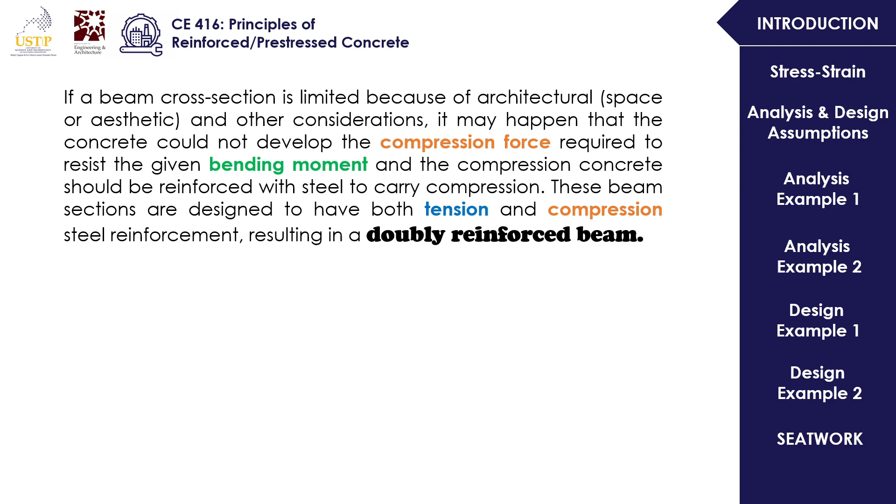This type of beam is known as singly reinforced because it's reinforced only on the tension side. Typically, if it's at the bottom, that's positive bending, and if it's negative bending, the tension is at the top.

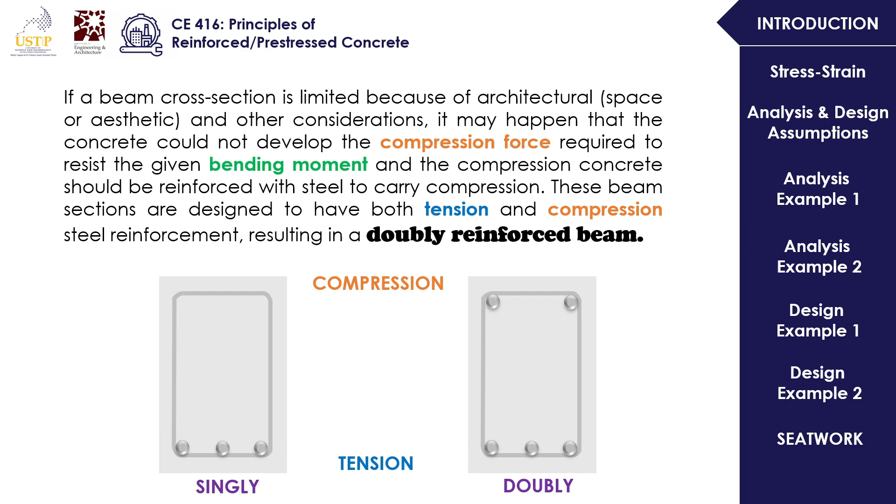So the question is, how do we distinguish or know if we should design a certain beam as singly reinforced, and how do we know when it requires doubly reinforced design? Here is a governing equation that tells us when to use what.

If your design strength (phi Mn) is greater than your actual or ultimate moment, this is a singly reinforced beam, meaning it is only reinforced at one side.

Now, if your design strength is less than your actual or ultimate moment capacity, it is now called a doubly reinforced beam. So that's the overarching concept we should know.

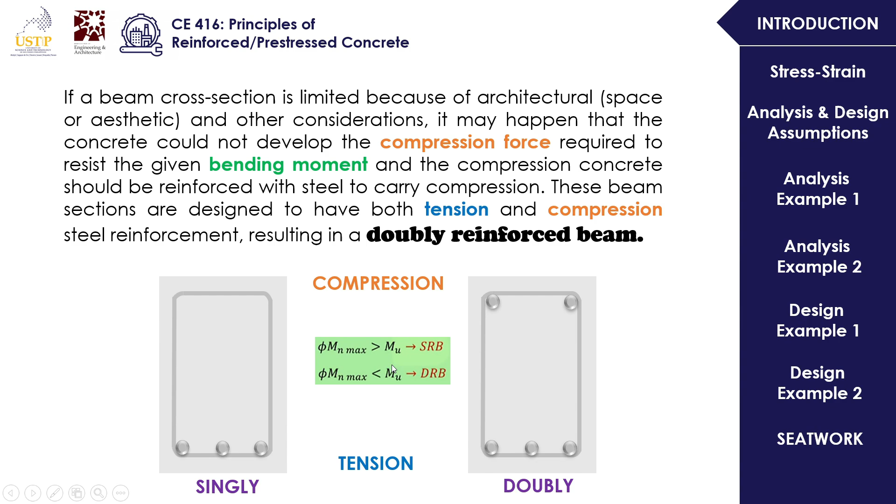Your beam can no longer handle the forces, so that's why we need to add more reinforcements. Even though a doubly reinforced beam is generally not economical, since it requires adding more reinforcement, more reinforcement means more cost.

The use of compression steel: although a doubly reinforced beam is not economical, using compression steel or reinforcement at the compression side actually has several advantages, including the following.

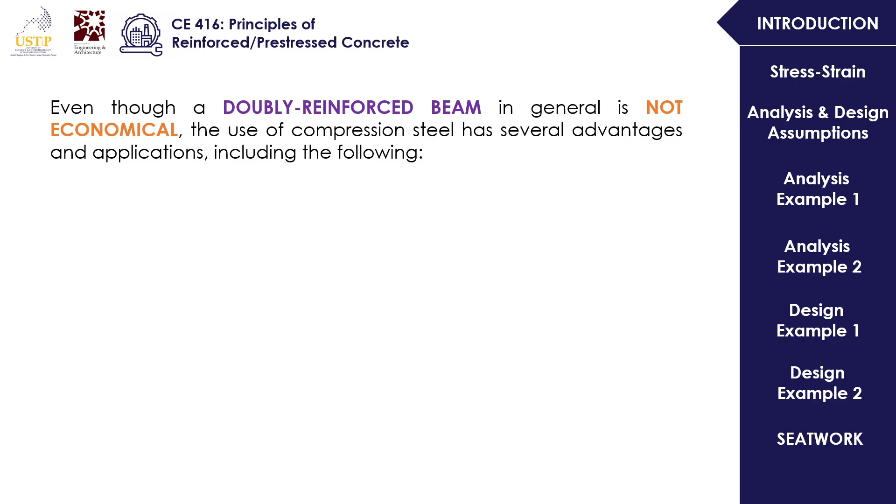It allows the use of a cross section smaller than that of a singly reinforced beam. A singly reinforced beam typically requires a wider or greater cross section compared to when you use reinforcement at the compression side. Since some designers or architects prefer not to have bigger beams, they compensate by increasing the reinforcements instead of increasing the cross section.

Aside from that, it also helps in reducing long-term deflections. The mechanism is that it counters forces, which reduces the possibility of deflections occurring in your beams over time.

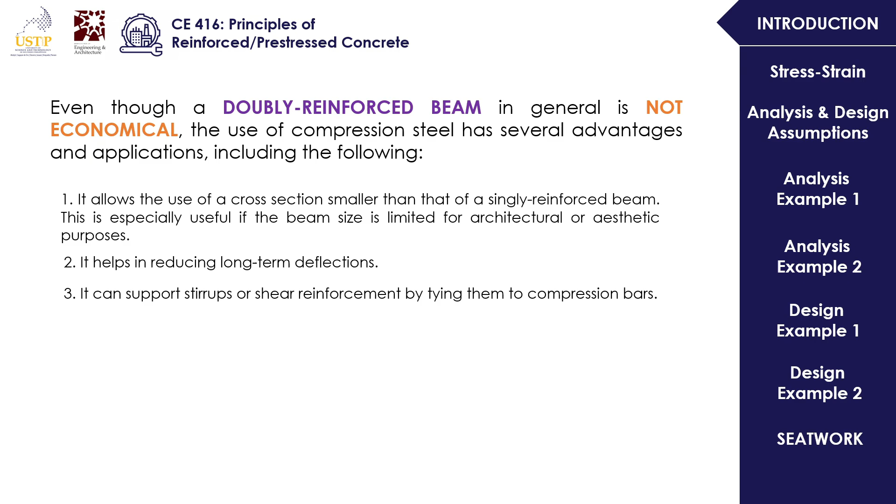It can also support stirrups or shear reinforcement by tying them to the compression bars, and it adds significantly to the ductility of beams. Compression reinforcement enables the beam to withstand large levels of movement and deformation under extreme loading conditions, such as during an earthquake.

I actually forgot to set up my calculator, so maybe I'll add it later. I actually forgot about it. Okay, wait, let me set it up.

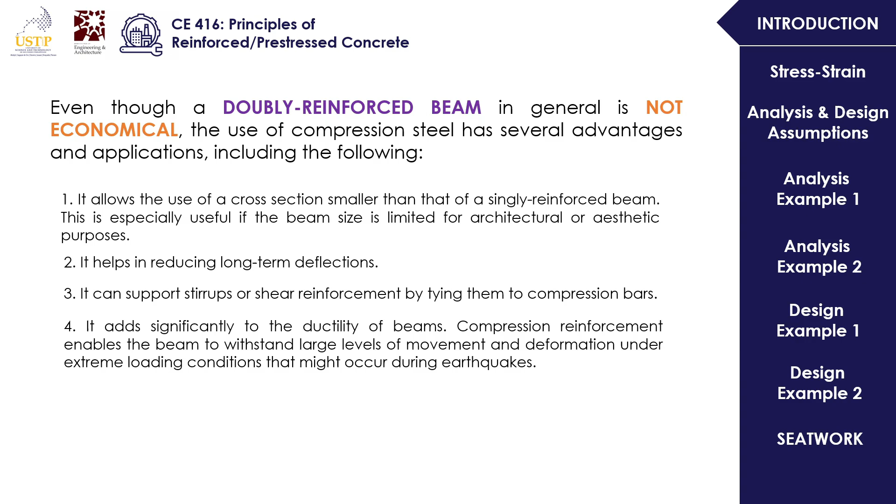So fourth, it adds significantly to ductility of beams. Compression reinforcement enables the beam to withstand large levels of movement and deformation under extreme loading conditions that might occur during earthquakes. And lastly, it is frequently used where beams span more than two supports due to practical considerations.

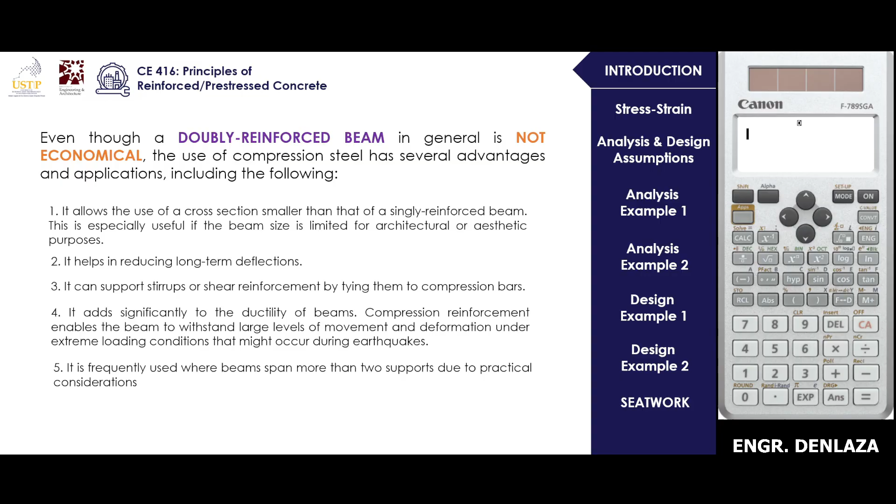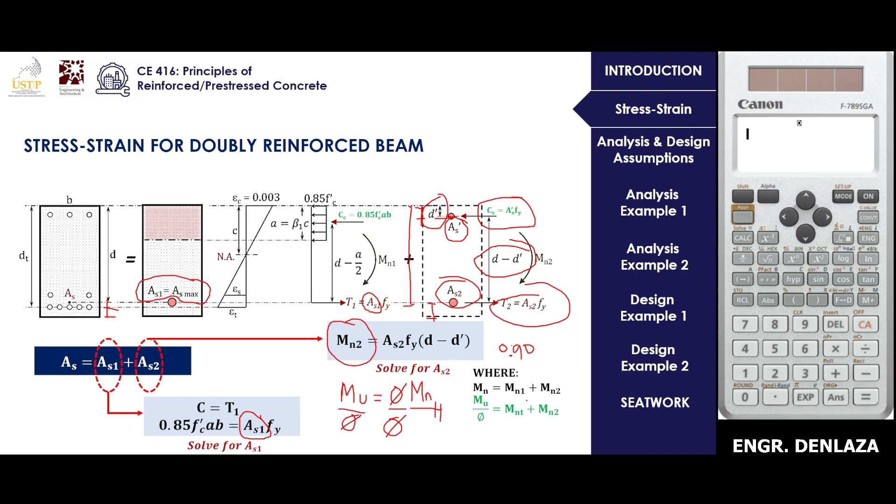Now, the analysis of doubly reinforced beams. The first step you will do - obviously since our topic is doubly reinforced, the problems we'll solve will likely be doubly reinforced. Last week our topic was singly reinforced, so that's likely what you solved then.

But in board exam scenarios, major exams, and quizzes, it will not be stated whether it's singly or doubly reinforced. So first and foremost, you need to determine or distinguish whether it's singly or doubly reinforced so you know what approach to take. So first, in analyzing doubly reinforced beams, you have to check whether it is singly or doubly reinforced by comparing the tension steel area only with the maximum permissible steel area allowed by the code.

So how do we obtain the total area of reinforcement? If it's in the tension bar, it's just pi over 4 times dB squared, times the number of tension bars. Take note, we only consider the tension bars. Don't consider the compression bars. And you compare it with your maximum steel area.

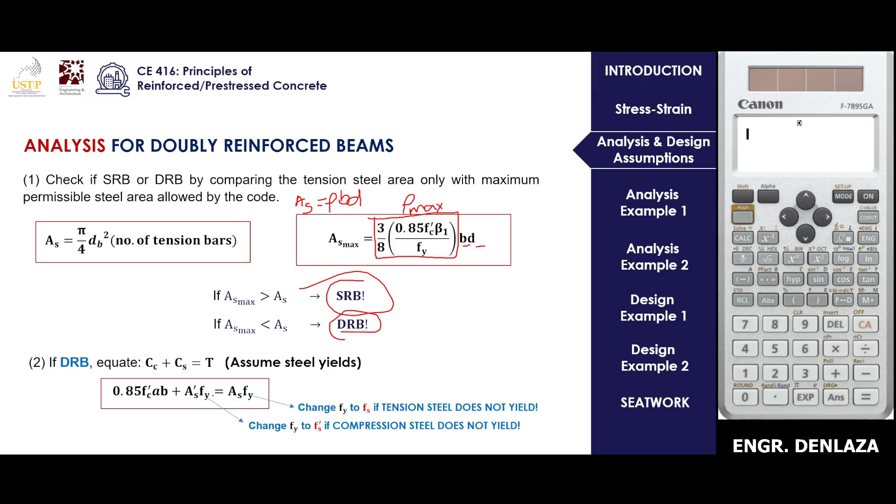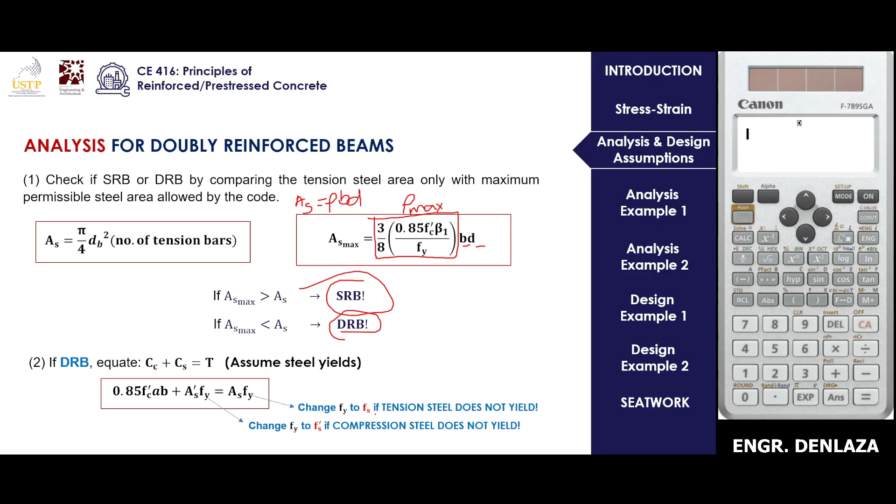So that's 0.85 Fc prime Ab plus AS prime Fy equals AS Fy. Right? Now when you check - remember last time everyone was confused - 'Ma'am, what if it didn't yield?' So first, you change Fy to Fs prime if the compression steel does not yield. And you change the tension side's Fy to Fs if the tension steel does not yield. That's all, simple as that.

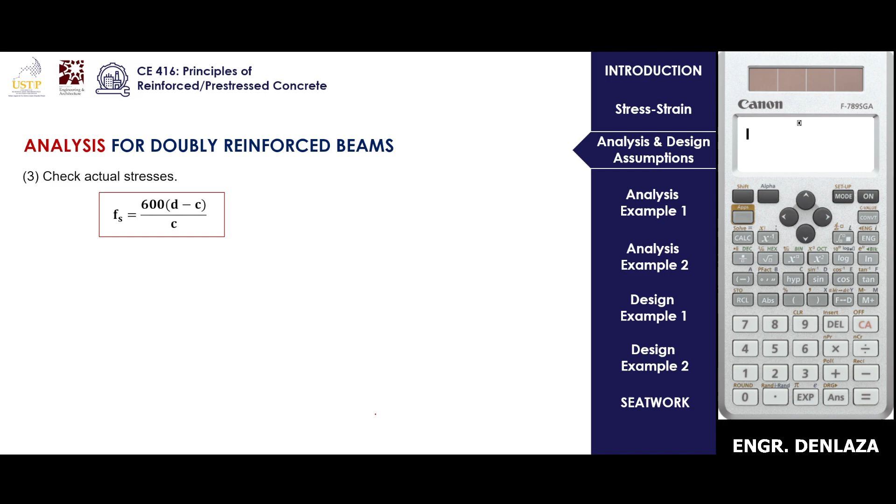Now, last time we introduced that the actual stress Fs is equal to 600 times the quantity D minus C over C. Now we're moving to another formula to get the actual stress for the compression side, but that's what you learned last time: 600 d minus c over c.

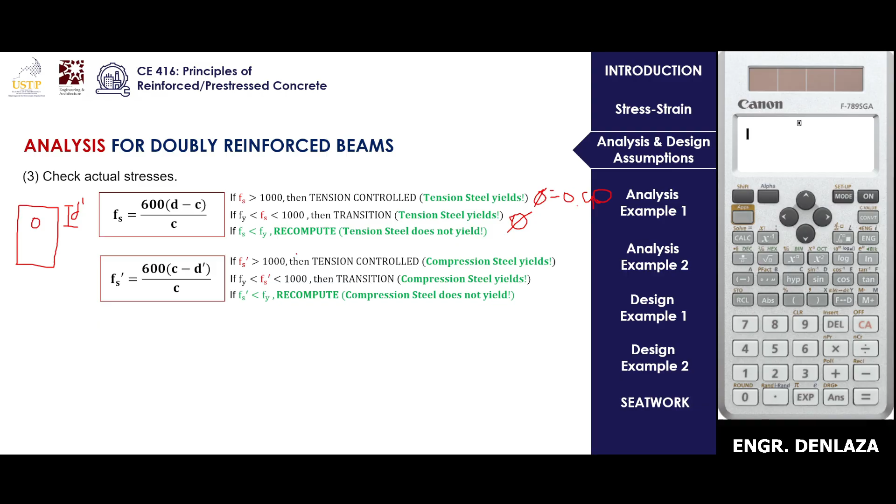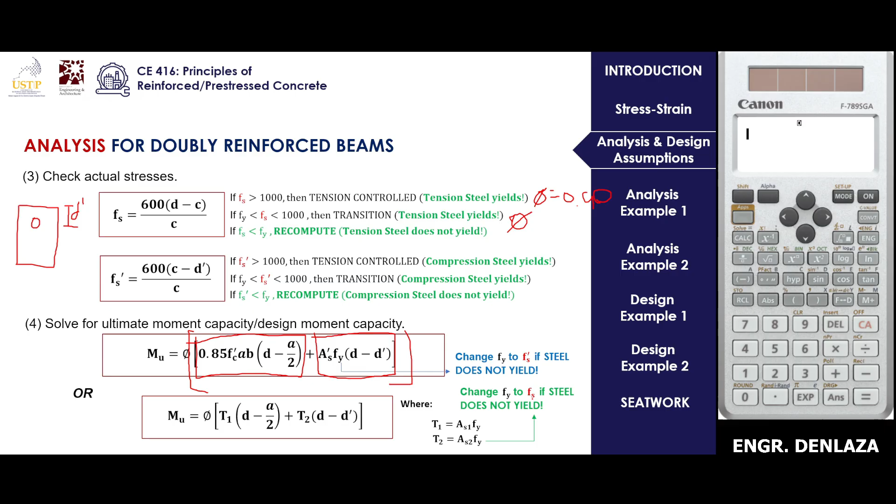Where T1 is AS1 times Fy, and T2 is AS2 times Fy. Take note: if your steel did not yield, you have to change the second term's Fy to Fs prime, because this is the component for the compression. So, change Fy to Fs if the steel does not yield.

So let's continue. Design, this is for analysis. Now this is for the design of doubly reinforced beams.

So for the design of doubly reinforced beams, solve for the Cmax and alpha, or your A, the depth of the stress block. Recalling, Cmax is equals to 3/8 of your effective depth. Next, A is equals to beta 1 times Cmax.

A lot of you made mistakes on this last time in your laboratory because you didn't memorize the table for your beta. Actually it's easy to memorize, it's just 0.85 or 0.65. It's just that you got confused about the boundary. So recall that, it's in Lecture 2.

So for the maximum design moment for tension-controlled condition, check if it's singly or doubly reinforced beam. The equation is phi Mnt equals 0.85 FC prime A B times quantity D minus A over 2. Take note of the condition: if your MU, your actual moment, is less than your phi Mnt...

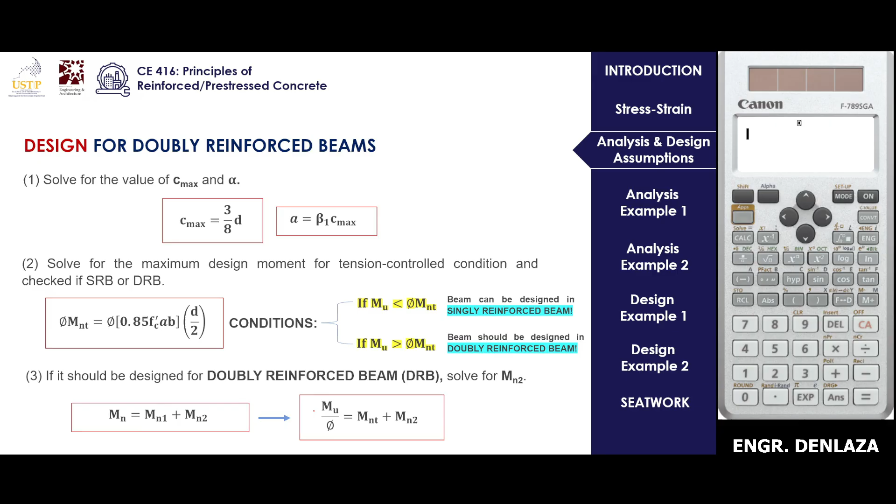After that, solve for the total area of steel reinforcement for the doubly reinforced beam. So you isolate tension and isolate compression. Then after that, solve for the number of tension and compression bars.

This should be familiar, nothing has changed. It's just that, take note, AS is the total area of steel reinforcement, and this becomes the basis for the tension bars. For the compression bars, this becomes AS prime or AS2.

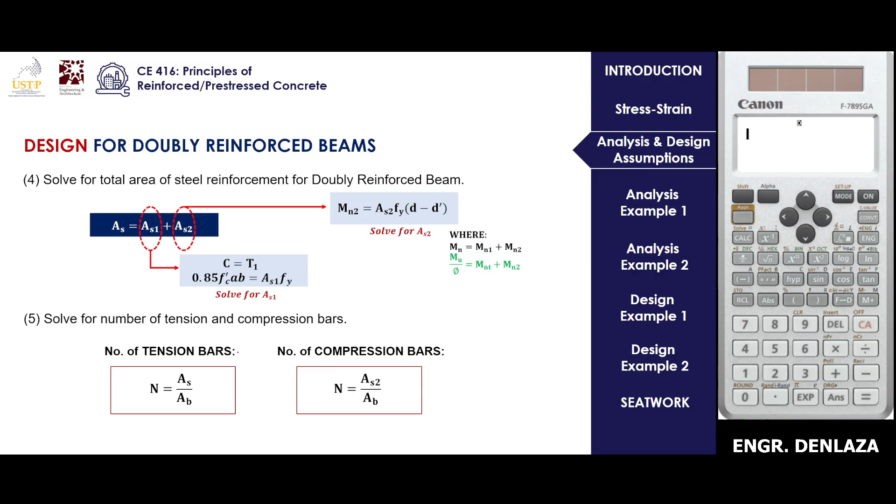So later on you'll see what I mean. Let's go to example number 1. This one is also easy, I tried my best to provide solutions that are easy to understand.

So determine the design moment capacity. We're still on analysis, there are 4 examples right now, so this is still analysis. It's not too hard.

So again, determine the design moment capacity of the beam shown in the figure, for which your yield strength is 413.7 MPa and FC prime is 20.7 MPa.

So this is your cross section of the beam, with a base of 350 and total height of 675, and the distance from the tension fiber towards the centroid of your tension reinforcement is 75 mm. And as I explained earlier, D prime is the distance from the compression fiber going towards the centroid of your compression reinforcement.

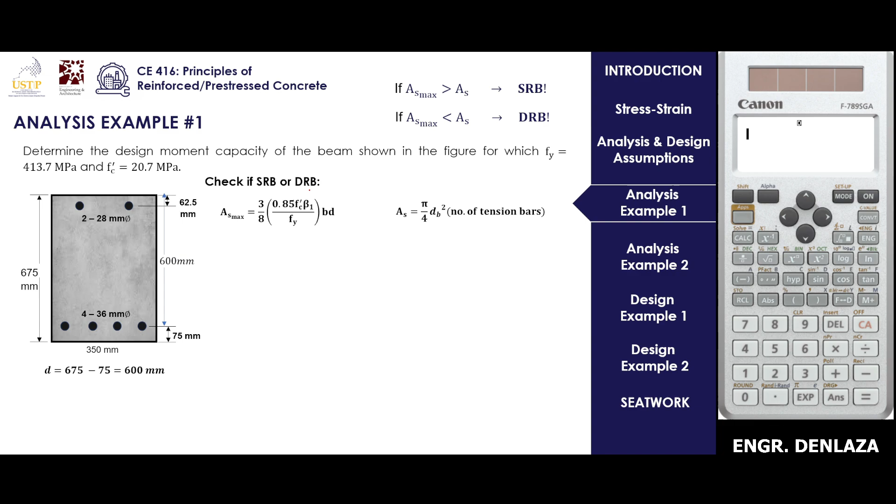So expounding: that's 3/8, 0.85 FC prime, with FC prime being 20.7. Beta, as I said, is 0.85 since it's in the boundary of 17 to 28. Fy is 413.7, base is 350, and depth is 600. So the AS max is 2846.91 square millimeters.

Now going back to AS, that's just pi over 4 times 36 squared, times 4 - the compression bars are not involved here, yes, they have no bearing, we only consider the tension bars. So that's 4,071.50. So checking the relationship...

Your AS max is actually lesser than your total steel area of reinforcement. So this tells us that this design is actually a doubly reinforced beam.

Later on we will need the total area on our compression side, so let's compute that now since we're already here. That's pi over 4 dB squared. So let's store this as AS or AS prime since we'll use it later on.

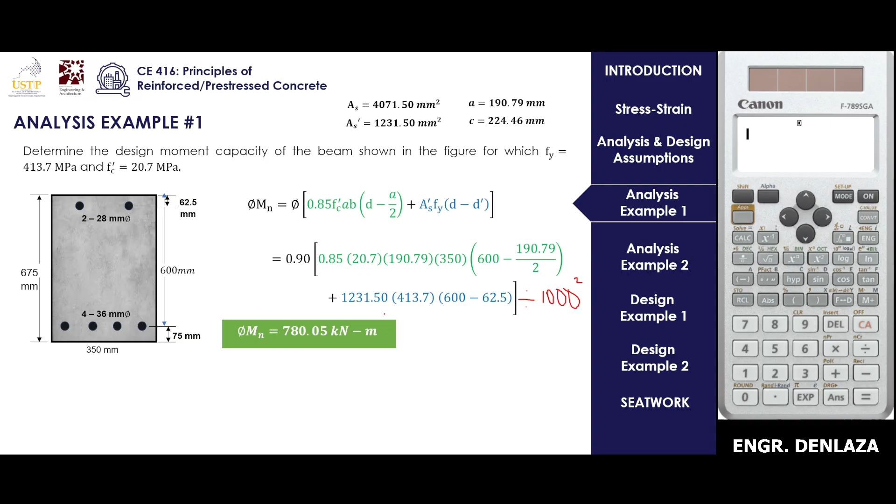That's the first answer for this problem. Now let's go to example number 2. This is also analysis of a singly... actually doubly reinforced beam, given the properties, but this time we need to get the depth of stress block.

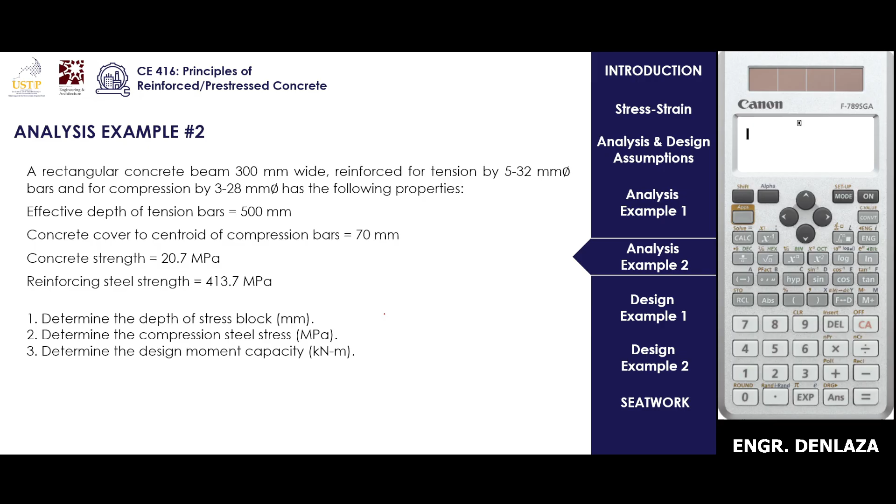That's alpha or A. And compression steel stress, that's Fs prime. Then determine the design moment capacity, that's Phi-Mn or your Mu, to be safe. So that it's not crowded, we illustrated the given values.

So here's the illustration guys: 532, 328, 70, and then 300, and then 500. FC prime and FY are given.

So now determine the depth of stress block. Even though it's the depth of stress block, still check if it's SRB or DRB. That's 3 over 8, 0.85 FC prime beta over FY, BD, and then your AS. Simplify: FC prime is 20.7, beta is 0.85, FY same as before. This time, 300 is your base, and 500 is the effective depth. Simplifying, the maximum area of steel reinforcement is 2033.50 mm squared.

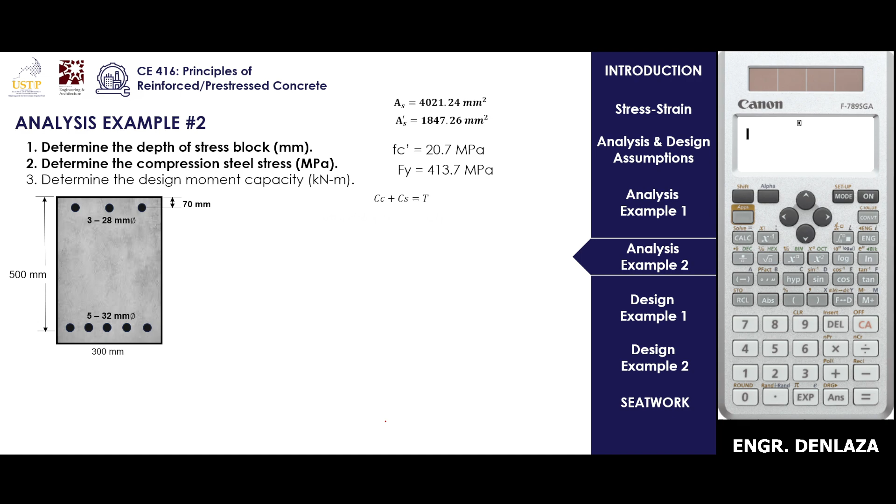So instead of using Fy, we use Fs prime now. Since compression did not yield, we only change compression, right? That becomes our goal now so we can go directly to the compression steel reinforcement. Since there's no value for C yet, we can't go directly - since Fs prime itself has variable C, we might as well treat C as our unknown. Notice I did not change Fy on the tension side or... since tension still yielded. Only compression did not yield, so only that gets replaced with the actual stress.

Expounding on that, here it is: 0.85, 20.7, 0.85 because that's beta, and then C here is the unknown, then base is 300, plus AS prime, 1847, and then that Fs prime equation - but I replaced it with C to make it clearer what we're solving for - minus D prime, then equals AS times FY. Same as before, to get C.

Now checking if it's singly or doubly reinforced. Since we know the design approach, it's not the same as singly reinforced where you use AS max or C-max.

But since we already have the values of our moments, let's get the factored moment. We have service moments, so we need to factor them: 1.2 times 320 plus 1.6 times 575, giving us an actual moment of 1304 kilonewton-meters.

Now going back, your approach to compare whether it's singly or doubly reinforced is to get C-max, which is 3/8 of your effective depth.

Pila man na siya. So, that's 256.875. Now, you know that your stress block is equals to beta 1 times C-Max. So, nakay 0.85, 256.875, so nakay 218.34.

MNT, now guys, can be obtained using this equation since naa na tayo value sa letter A. So pwede na siya makuha. 0.85, 25 man ang atong FC prime. Natay A nga 218.34 then 350, 685, 218.34 over 2. So natay makuha MNT is equals, Phi MNT is equals to 841 moment at the tension side. That's 841.58 kilonewton meter.

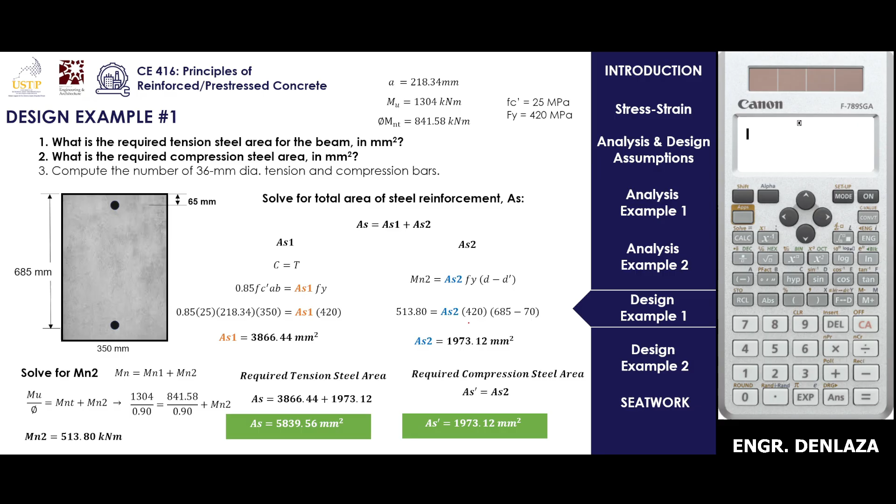If for the compression na pud, wait lang ha, naa ng typo naman eh. Naa siya typo, so it's not tension, dili doble lang na siya, wala na i-date. Okay, asa naman ta? This is now, instead of writing compression, tension, it should be rather compression. Nana ba siya? Naulay lagi ni siya, isun ra lagi nakabutang. Sige.

Okay, compression bar, so that's 1973.12 mm squared. AS prime over AB, so that's 1973.12. Kuhaan nimo, that's 2 pieces, 236 mm.

Muna siya si example number 3, and last example na ta, mas taas. Pero before that, I will just edit katubi tong example kaganiha nga final answer. Oo kani, it should be, wait lang, ako sang i-edit.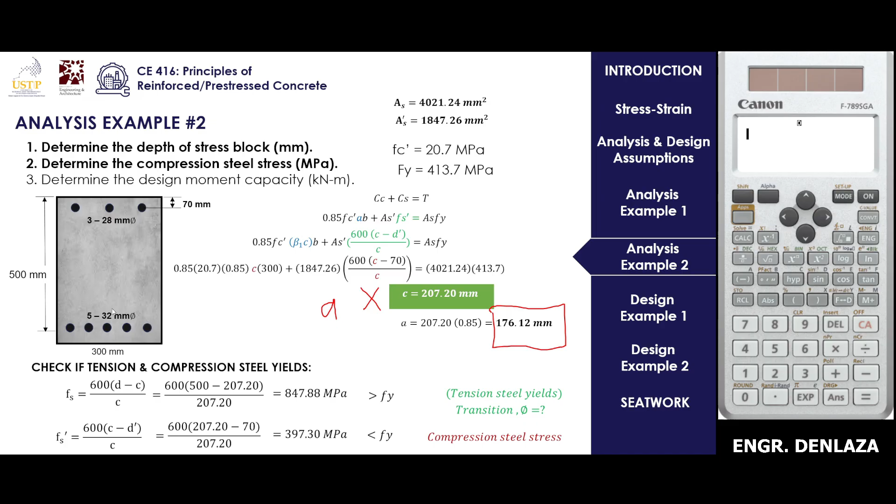Going to example number 4, and this is, I guess, the last example for this problem, this lecture, and I think the second problem for the design. A 5M fixed ended beam, so this is the illustration of a fixed ended beam. Left side siya restrained, and it carries superimposed dead loads and live load, and at mid-span kuno na daw siya 150 kN applied, na daw siya beam section of 350 and total depth or the height is 770. So we are to get the actual factored moment, number of tension bars and compression, and the design moment capacity. So let's start.

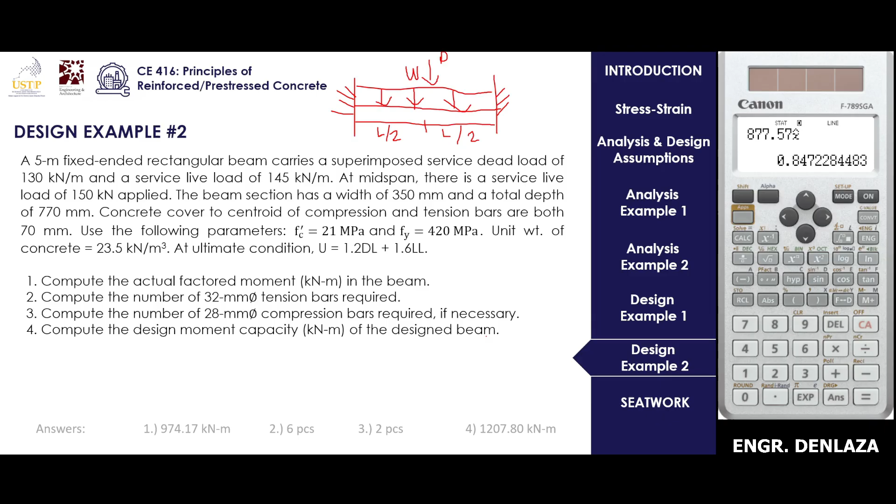So again, uniform loads, dead load, first na to buhaton is kuhaon na to si uniform dead load. Diba, take note nga ang given lang was superimposed si dead load. So kinahanglan tag self-weight sa beam. So that's UDL 130 plus 23.5, the base times the entire height. So you would be able to get uniform dead load of 136.33.

So sa live load naman, as is lang siya because wala may other components si live load. So since these are all service loads, so we have to do factored loads. So that's 1.2 times 1.6. So 136.33 and 145, we'd be able to get 395.60. On the other hand, for the point load itself, since walay other components si live load, walay dead load, so times 0 si 1.2, and then yeah, you'd be able to get a point load of 240, factored load.

This is your beam illustration. This is the beam, fixed-ended, uniform distributed load of 395.60, and then uniform point load at midspan, that's PU equals 240 kN.

Let's remember your superposition method. Since we have two variations in our loading, the uniform load and the point load, we need to segregate them based on the superposition method.

Let's recall the theory. This slide pertains to a beam fixed at both ends for UDL (uniformly distributed load) and CLC (concentrated load at center). Since we're interested in the maximum moment at the ends, that's WL squared over 12. And for maximum moment at center, it's PL over 8.

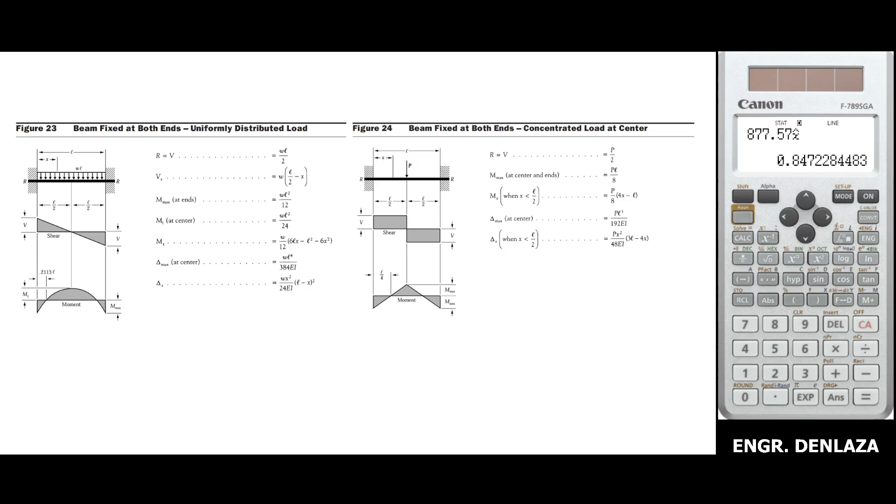So this is our origin equation: WL squared over 12 plus PL over 8. Actually, there are variations for this. There are other methods to solve for indeterminate beams, but for me the simplest, easiest, and most time-efficient is superposition. Although you have to memorize the formulas, it's still easier compared to doing calculus.

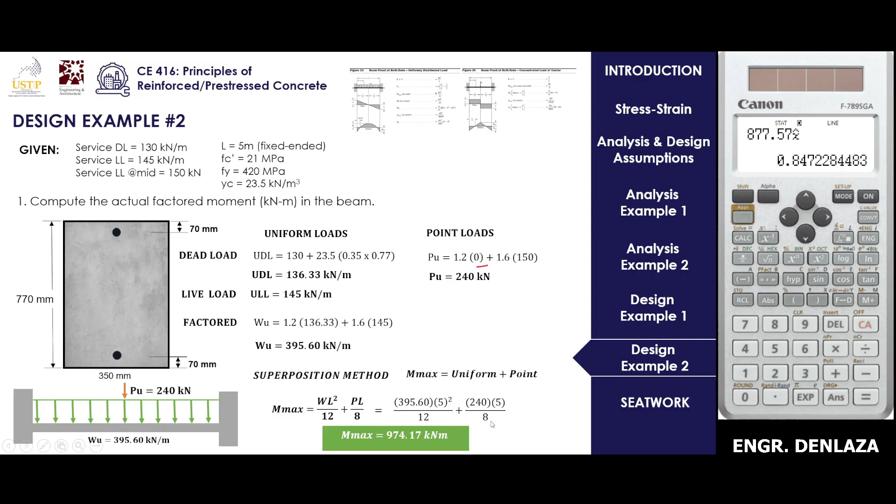So plug in 395.60, that's your W, times L, and then L squared over 12, plus 240 times 5 over 8. So we get a maximum moment of 974.17 kNm. Now compute the number of tension bars.

Check if it's SRB or DRB: 3/8 times D. Take note, 770 is our total height and 70 is our effective concrete cover. So 770 minus 70 gives an effective depth of 700.

So we get 262.50. And then A equals beta times C, 0.85, 262.5. And then we get 223.13.

So that's 223.13, 350, and then 700 minus 223.13, that's 738.25. Comparing that to your MU max of 974.17, it's larger — actually lesser rather. So that's DRB.

Solve for MN2: MN1 plus MN2 equals 974.17 all over 0.9. That 0.9 comes from the fact that nominal capacity MU equals phi times MN. Since you need to isolate MN, you just divide by 0.9.

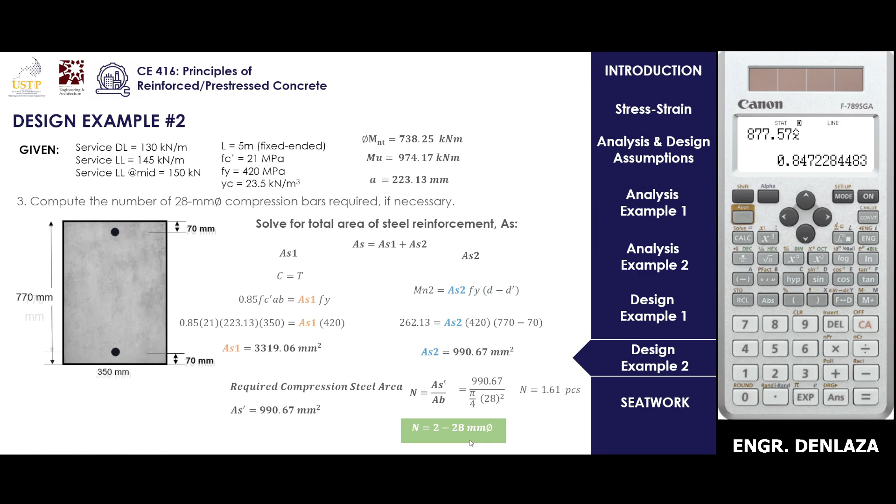And lastly, the design moment capacity: 0.85 FC prime AB plus AS prime FY equals AS FY. Now solve for AS and AS prime.

In order to get C, divide that by 0.85, giving 284.25. Check if the tension has yielded: that's 600 times D minus C over C, so 600 times 700 minus 284.25, giving 877.57.

That is less than — sorry, that's a typo, less than — 1000. This tells us that this specific zone is in the transition zone.

Now, if your Fs prime, the actual stress on the compression side, is 284.25 minus 70, we get 452.24, which is greater than your Fy. So that means the compression steel yields.

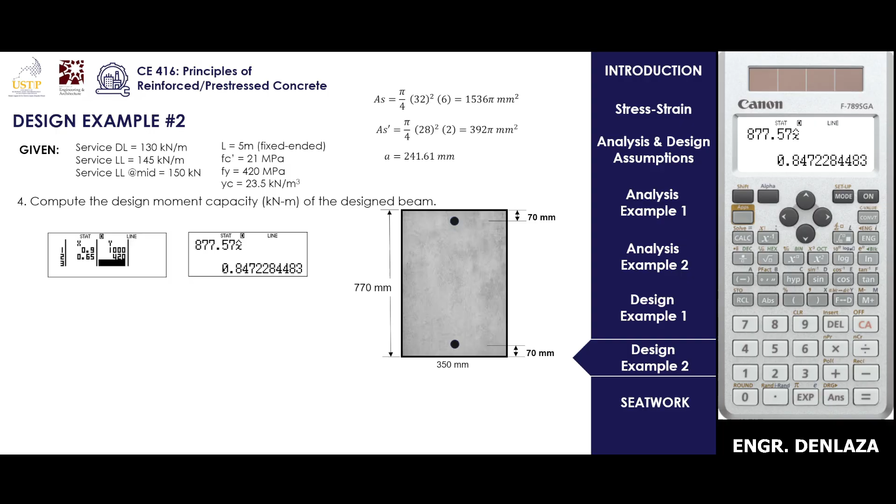So we get the strength reduction factor, since it's smaller, similar approach. But this time it's 877.57, coming from your Fs, 877.57, coming from here.

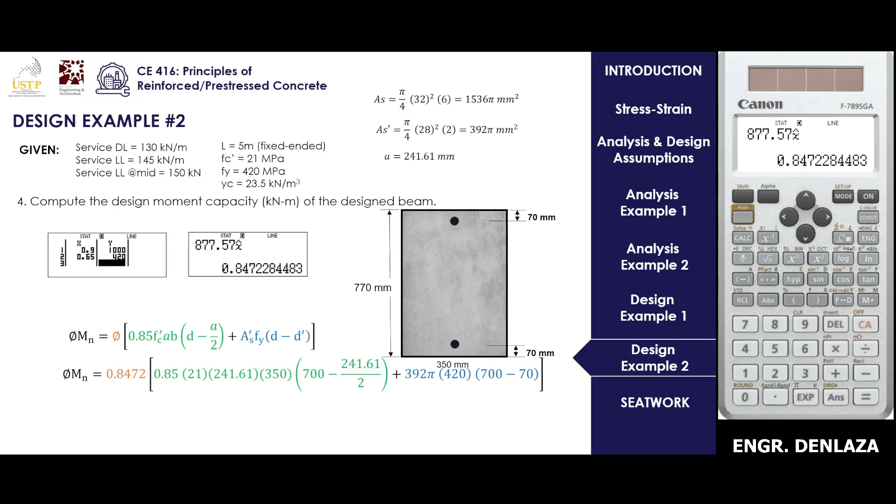So we get the exact value, 0.8472. Plug in 0.8472, 0.85, 21, 241.61, 350, 700, and so on. Simplify and we get the answer to be...

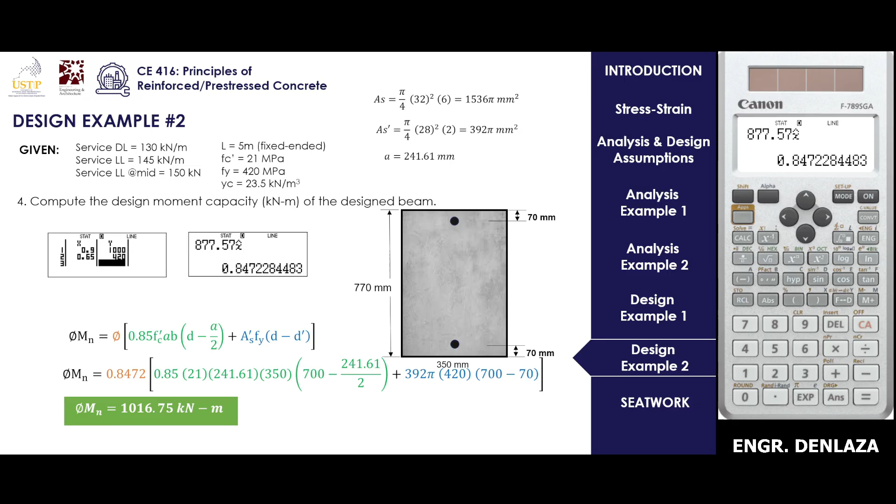1016.75. And I think that concludes our discussion for this lecture, and see you on your quiz number 2 this coming Tuesday and Thursday. Bye.